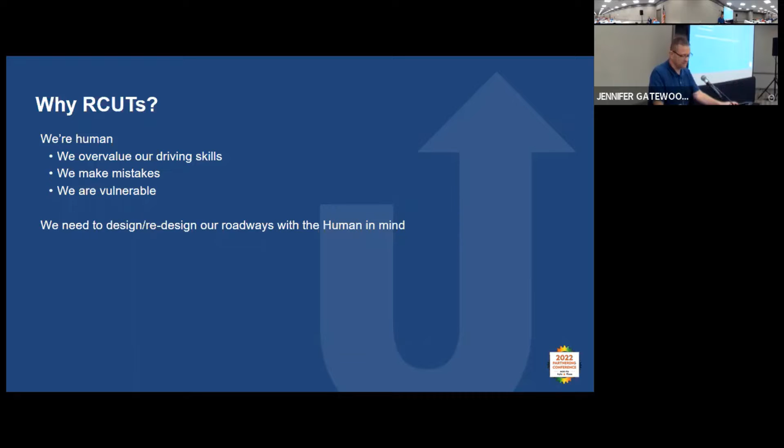So more specifically, how do RCUTs help? Well, the big thing I like to remind everybody is, even though it looks complicated, RCUTs are actually simpler to drive. There's actually a lot less workload for the driver. And that is because of the much lower number of conflict points.

So it helps address some of that vulnerability with the driver. But just in general, because of those fewer conflict points, there's just a lot less workload on the driver, and there's less things to keep your eye on when you're at an intersection. You're going to be more successful and less likely to make a mistake, which then leads to less crashes. So just having fewer crashes opens up the opportunity for fewer of those severe outcomes.

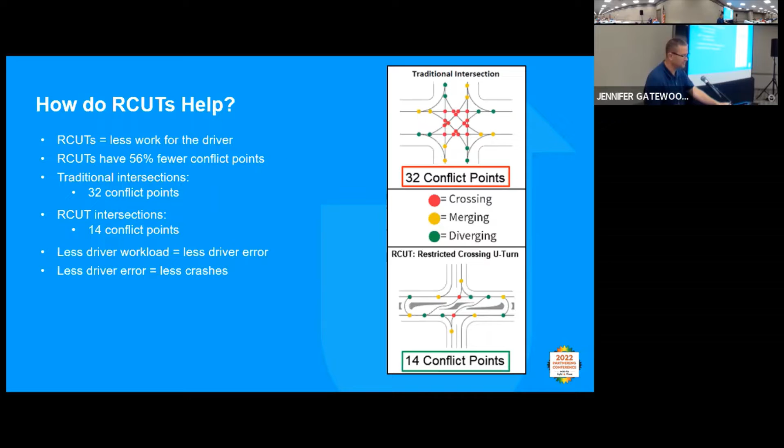So more specifically, what kind of benefits are we seeing? Well, they're pretty significant on the safety side, and there's some capacity benefits too. I'm a big proponent of safety, so let's talk about those benefits.

When we look at RCUTs on the national scene, we're seeing about a 30% reduction in all crashes, not just angle crashes, all across the board at the intersection. There's a lot of safety countermeasures where 20-30% is a pretty big deal.

But when we look at severe crashes nationally, we're seeing about a 70% reduction. There's a lot of variance across RCUTs nationally, so it's not like they're hitting these numbers precisely, but on average, 70%. That's enormous—there's a lot of safety countermeasures that would love to be above 50%, but few obtain that. RCUTs have been proven to really do a good job.

In Kentucky, we're seeing a little bit better than the national reductions, which we're really excited about. We've got 8 RCUTs in Kentucky on the ground with at least 2 years of after data or more. When we look at those, we're finding almost half of our total crashes have been reduced. The big plus is we're really close to 90%, 87% of our severe crashes—many with an injury or worse—have been reduced in our first 8 RCUTs. We anticipate seeing that trend continue.

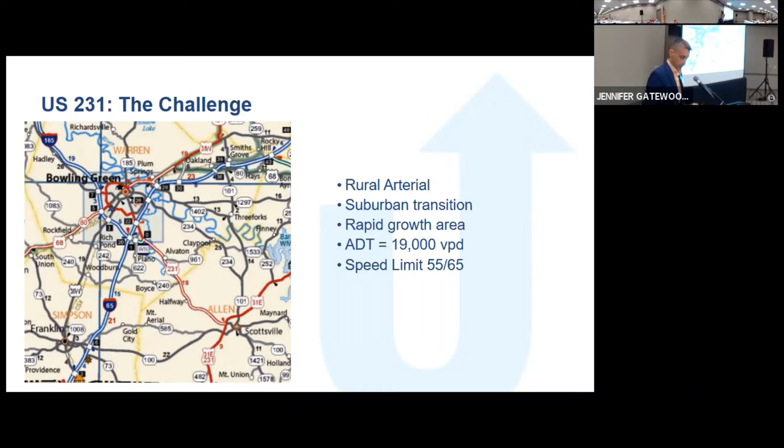Also worth noting is the speed limit—the posted speed limit changes within this project corridor. It's 65 miles per hour from about halfway through the project to Scottsville. I'll point out on the map, you'll hear us talk about the community of Alvaton, right here in the middle of the map. That's the south end of the project, highlighted here.

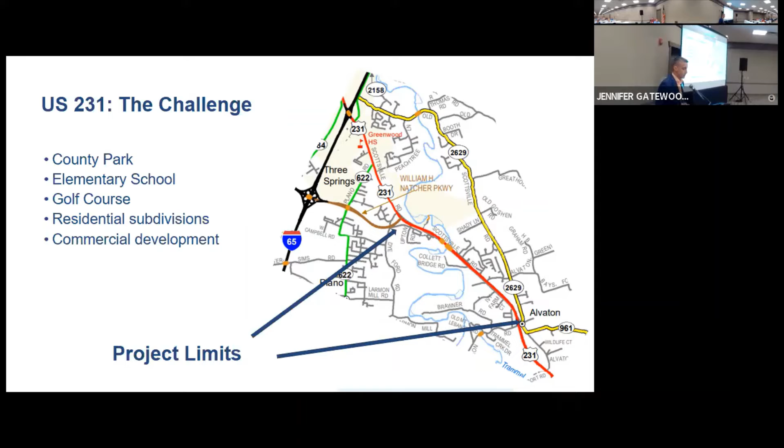As we zoom in on the next slide, just to get your bearings about the project location—the project has along it a county park which is very active, with a lot of special events; thousands of people come for softball games, cross-country meets, and other big events. There's an elementary school in Alvaton, which is at the south end of the project. The Natcher Parkway's southern terminus is the north end of the project. There's also an internationally acclaimed golf course along the project, residential subdivisions throughout, and some commercial development starting to happen along the corridor.

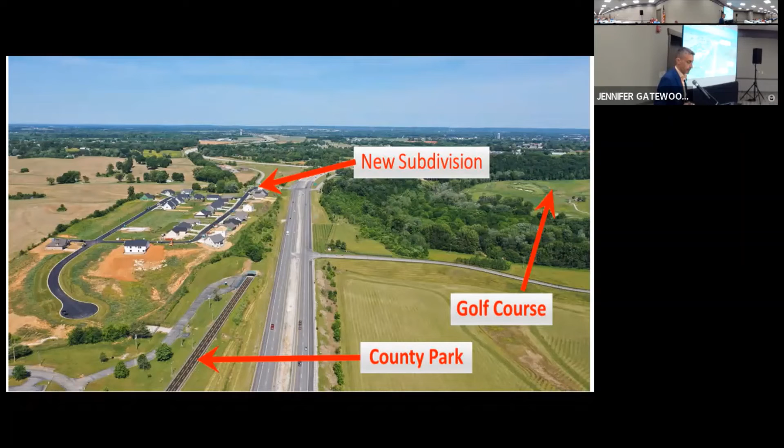These photos will show basically what I was explaining on the map. This drone photo is looking north toward Bowling Green. The Natcher Parkway intersection is the north end of the project. You can see new subdivisions, the golf course to the right, and the county park starting to emerge on the left.

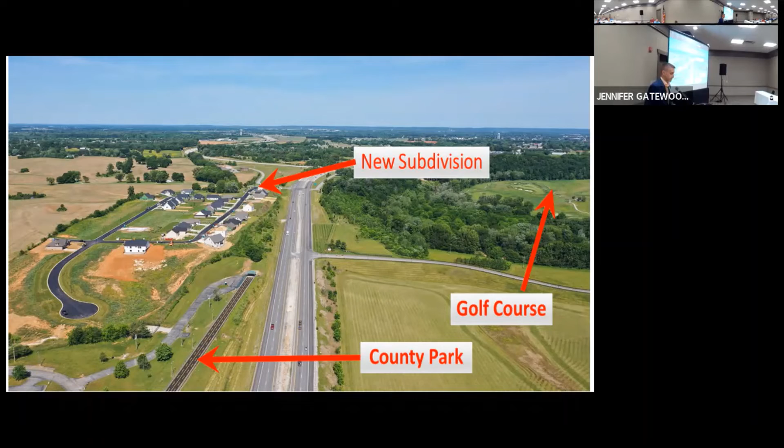I'm thankful to say that with the RCUT project, we were able to be proactive and get in there before signals became necessary. This intersection in Alvaton is at Mount Lebanon Church Road.

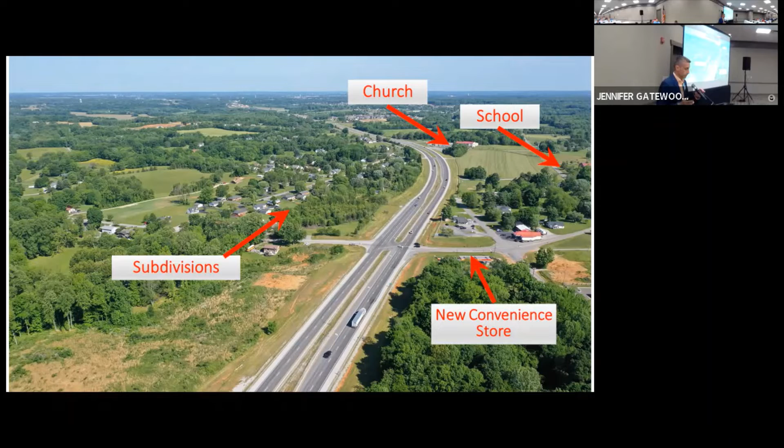This was the primary intersection that was of concern. When Mike Vaughn and his counterpart, Deanna Mills, came in early 2019 and said, Mike, I got a project I want you to look at, they were in Bowling Green for another project inspection. So we took a tour, got in the car, went about 15 minutes south, and I showed them this intersection because we had some crash experience.

I wanted to see if we could be eligible for some HSIP funding. And to my delight, as we drove through the corridor, we said, well, we should do all of these intersections. It's about 2 miles of these type of intersections, subdivisions, as I mentioned before. A lot of exposure to risk.

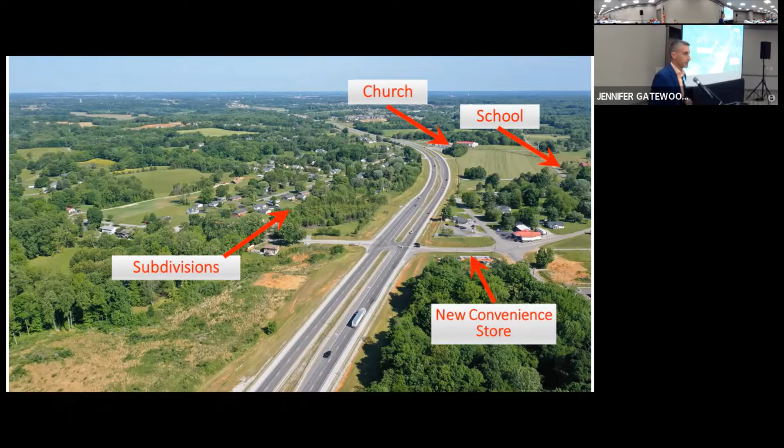So the way we went, April 2019, design funds were authorized, but the challenge had only just begun. Just a few months later, in July of 2019, there was a fatal crash at that intersection I was emphasizing on the previous slide. A slow-moving vehicle turned left into the side street, and then there was a crash that resulted in a fatality.

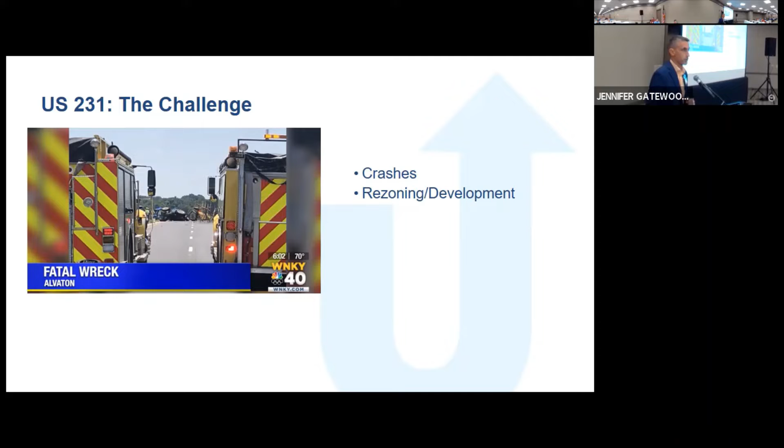So, of course, immediately the calls come, as they had been previously, about the need for traffic signals, along with the rezoning for development, month after month. I'm sure you see it in your community, the planning commission meetings, standing room only, folks coming, the NIMBY type folks coming to oppose anything new, subdivisions, apartments. But yet they continue to be approved and constructed.

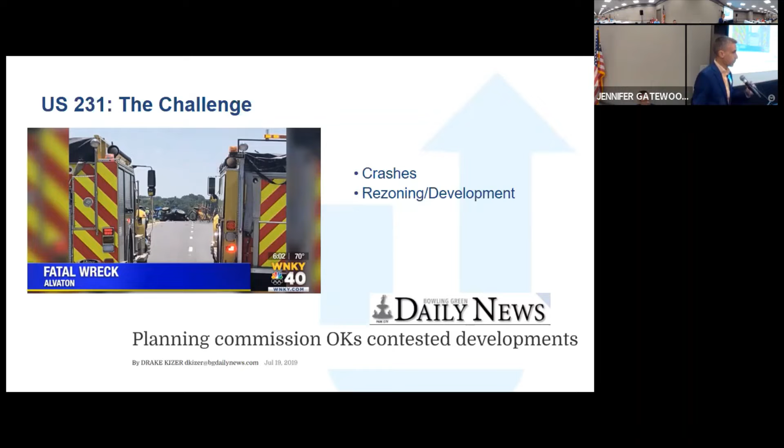So we needed to get this project on the ground as soon as possible. And fortunately, we had the design funds that summer, but we had to work with the public to address that we know and we're working on it, please be patient. Fortunately, we were in District 3, we were fortunate that we had a couple of these that were either under construction or in design.

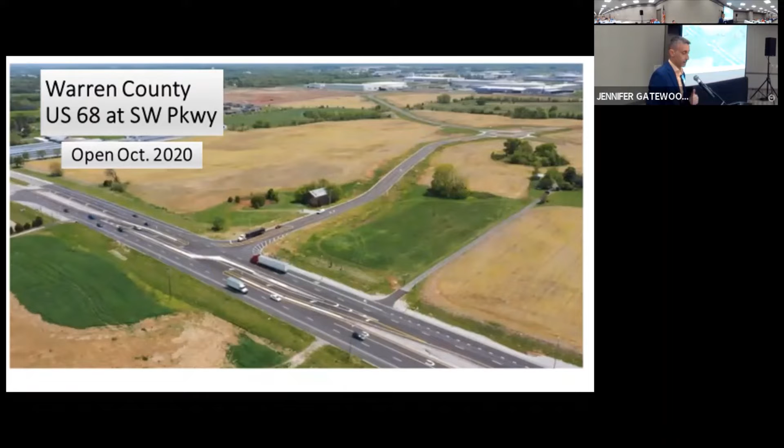So we were able to tell folks, hey, just go down the road. You'll see an RCUT. You'll see it in action. You don't have to try to describe it to you. You can drive one and see it in action.

But it still became the challenge. The challenge is, of course, engaging the user, and you can't do that with data alone. We've experienced that. I'm sure you've seen it at meetings where you try to portray something innovative like a roundabout, which we had experienced in Bowling Green a few years before, and everyone threw tomatoes at it until it opened, and then folks said, oh, this isn't so bad.

And that happened with the Logan County RCUT as well. Lots of concerns during construction. As soon as it opened, all the calls just went away, and people adapted. So we all had great hopes that would be the same way in Alvaton.

So there was no public forum, and this was by design. With safety projects, you don't really have time to have public meetings and asking people for input. And maybe that's a mistake. Maybe you would choose to do it differently. But we were concerned that if you give too much time, there's time for the opposition to do their part and stop the project. And we've seen this elsewhere in Kentucky where that has happened, specifically on an RCUT project.

But we did engage the key stakeholders. I told people I was like an encyclopedia salesman. So I got my exhibits and my maps, and I went to talk to the superintendent of county schools because of the elementary school - how is this going to affect school bus maneuvers? The judge executive in Warren County is the second longest serving judge in Kentucky, retiring this year after 29 years. So nothing happens in Warren County without his seal of approval for the most part. And then Jim Scott, who I told you we'd come back to, the golf course.

Be patient on one of these type of projects because there's going to be a lot of changes, and the project was constantly evolving as we were faced with those challenging growth issues. I grew up in District 3, just north of Bowling Green, went to Western Kentucky University in the 90s, and actually cut my teeth on this corridor, 231, as an EIT in the design section - and in metric, if you remember those days, built it in metric.

But you know how Bowling Green has changed over the years - as I visit the community now, I can't even find my way around. It's just amazing how much it's grown. So that's really part of the challenge here on this corridor, is that over time that 4-lane high-type facility just got really congested, and it's evolving so quickly.

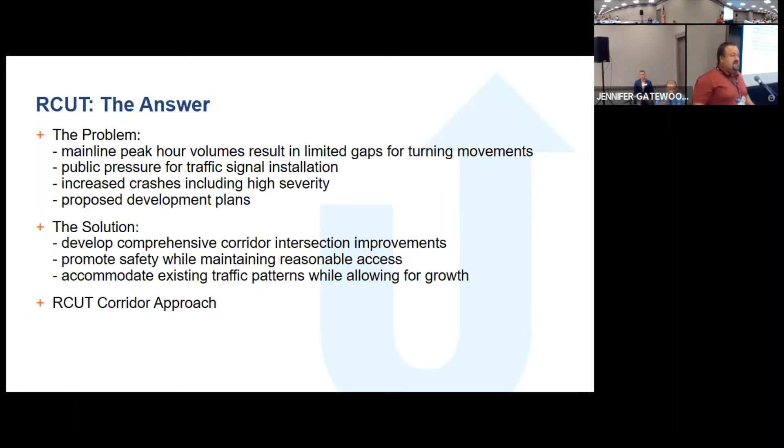The crash rates were rising, but the warrants for traffic signals were probably borderline, or probably not yet met. But a lot of the public pressure was there to install signals at that next level along the corridor. So having the leadership and the vision to create something different here - I think that's on the project.

So Joe did a great job of summing up the problem statement, and then the solution. We looked at a comprehensive approach to the corridor - we didn't want to just look at one intersection and isolate that and then put a signal somewhere else, put a signal down here. We really wanted to develop a solution that is corridor-wide, that's consistent, that raises the driver expectancy as they're traveling.

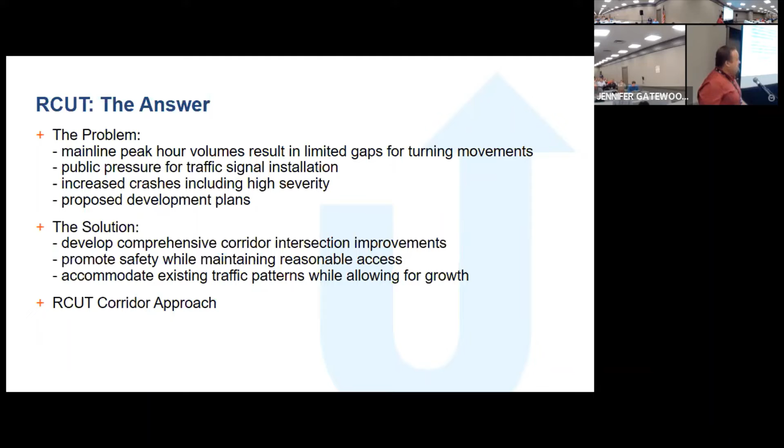So that's where RCUT came in. You'll see the phrase reasonable access, and I think Mike said it best earlier. If you look at RCUTs, it's really not changing access at all, but it certainly maintains reasonable access. On a facility like this, on Dixie Highway or any other 4-lane congested highway, there's no gaps at certain times. The peak hour volumes get to a point where there's no gaps, and without gaps to make left turns, you're going to make a right turn, turn around, and go the other way. We're just facilitating that in a less risky manner.

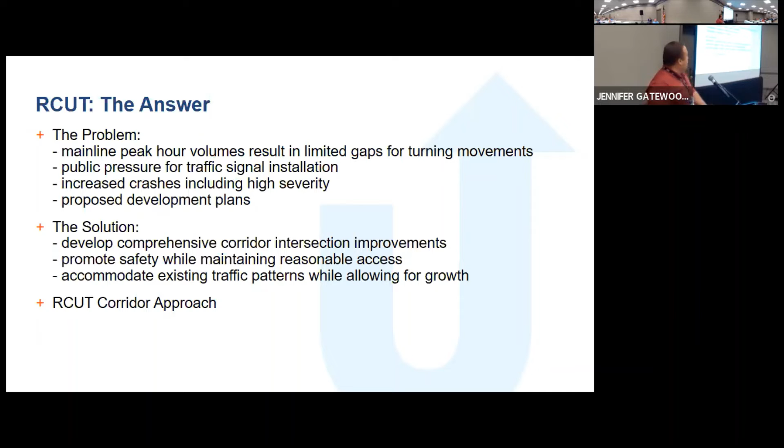With the design considerations, rapid growth, it was evolving constantly as we were putting the layouts together. I think we went through probably 10 or 12 iterations. We thought we landed on one, made some adjustments, then ran into utility issues and met the water district out there. They dug their facility up and said we can't get the material, and when we can, it's going to be expensive and we don't have time to relocate it. So we shifted things a little bit to avoid that situation.

Just the typical project development challenges you face on all your projects. But we really wanted to keep this moving. As Joe mentioned, we didn't want to lose steam on this project. So providing reasonable access includes the construction phase, and Justin's going to hit on that a little bit later—some of the challenges they faced in the field as this rolled out.

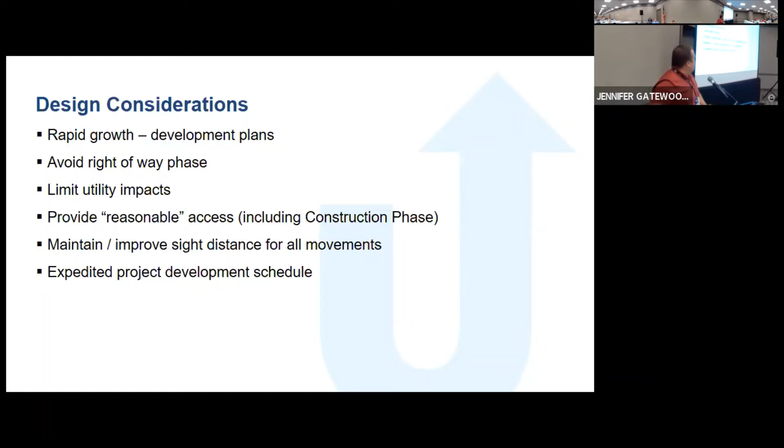And then again, I hit on the expedited project schedule. That leads us into the next part of the project, our proposal development. We decided early on, in order to keep this moving, limit right of way, limit utility impacts, and get this to construction as fast as possible. I think the project team would all agree now that we would do it differently, and we are doing it differently on other projects, but we did put this into a proposal type letting, and we probably pushed the limit on what you could do with proposal documents—putting plans with about 7 to 9 intersections into a proposal style procurement package. Justin's going to hit on that a little bit later too.

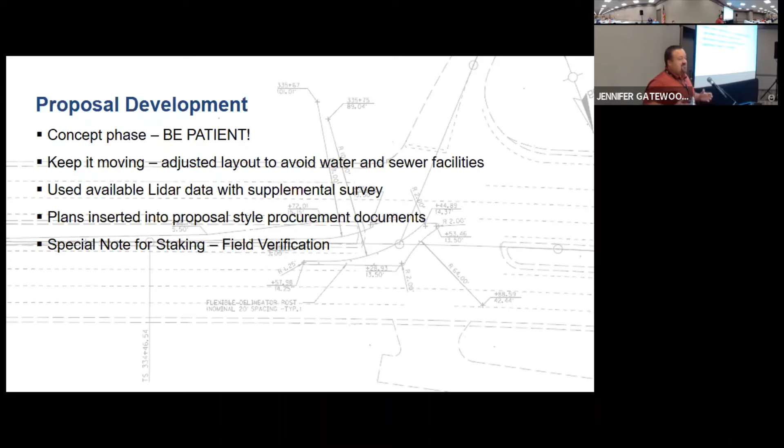But again, be patient as you're developing this type of project because things change all along the process. Don't be afraid to make tweaks and adjustments along the way, even if it's two weeks before it goes to letting—sometimes you just have to make the change. So keep it moving. We used available LiDAR data and supplemental survey, but we pushed the survey and that rolled into a special note for staking. You can see me after if you want to see what that looks like, but it was pretty long. The staking special note was pushed to the contractor, and Justin's going to hit on some of the challenges he faced in construction with that note.

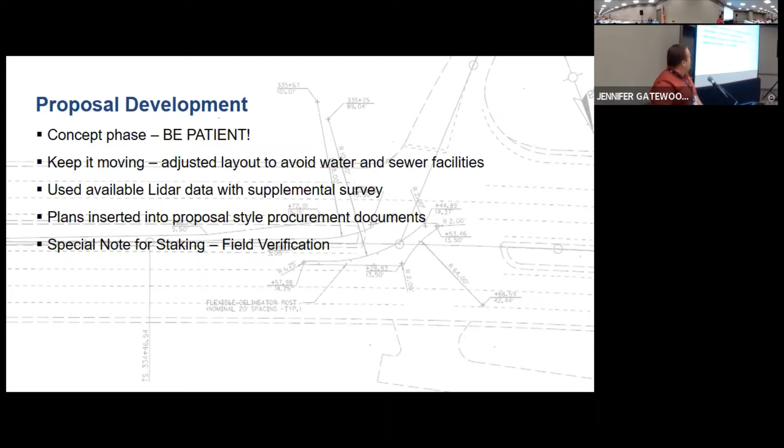So with that, Justin.

The letting date for this project was February 19th of '21, and the lowest bid was awarded to Charles Lewis Construction out of Franklin, Kentucky. The awarded cost was almost $3.5 million. The other competitor was Scotty's, which Joe had already mentioned—that subdivision is basically right in front of this corridor. They were still below Scotty's estimate, 14% below the engineer's estimate.

So we were a little surprised at that. That was our first red flag there, that we may have some challenges on this project. The completion date was November 15th, '21.

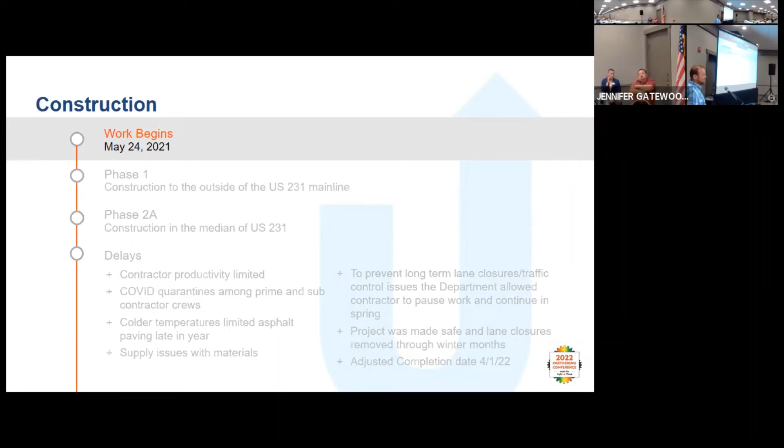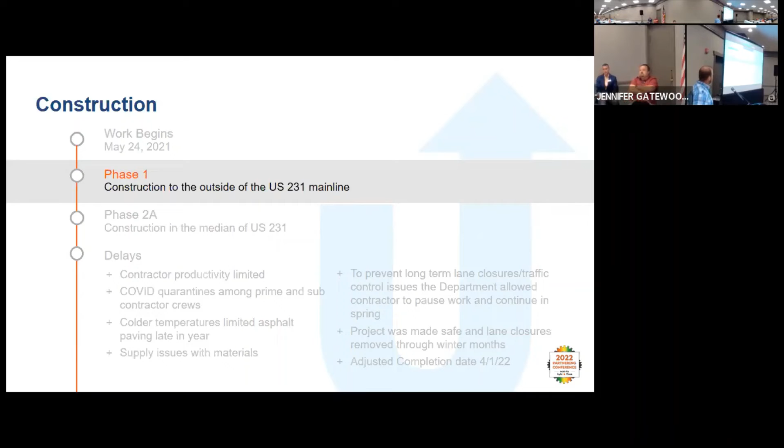Charles Louis began work on May 24th of 21, and this project was broken into 3 phases. Phase 1 was to close the outside lanes and construct everything on the outside of the roadway on both sides of the road. Then phase 2A was to switch traffic over to the outside, close the inside lanes, and construct the turn lanes and median crossovers.

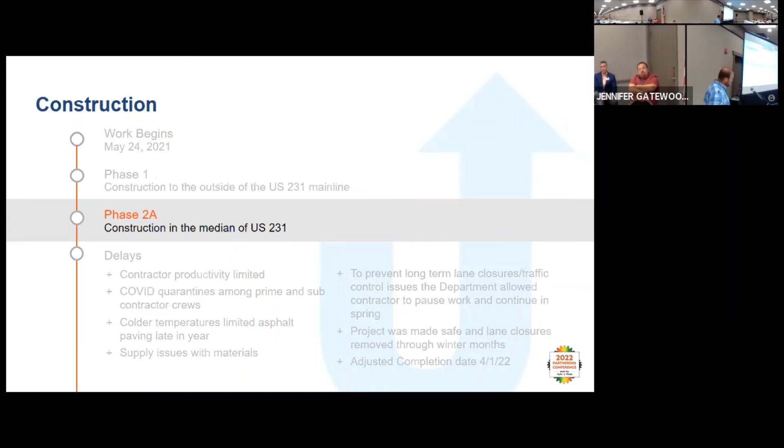Here's where we ran into some challenges. The first thing is the contractor was really limited on their productivity. They started out with one crew out there and had several mistakes. I know one instance, they milled up full depth shoulder that they weren't even supposed to work on, so they had to put that back full depth for several hundred feet. So they weren't that efficient.

We also ran into issues with COVID quarantines. This is the middle of the pandemic, and these quarantines were in the prime contractor and their subs, affecting their workers and the workload.

Going toward the end of the year when we got closer to the completion date, they were probably running about a month behind on their work, and the colder temperatures were limiting the time they had to put down the asphalt, which prevented them from getting the work done.

We also had, in conjunction with the COVID quarantine, supply issues of materials, especially pipe for the drainage work. As we were closing in on the completion date, we had several meetings with the contractor, and we realized they weren't going to get this project done before the weather was going to stop them from working anymore.

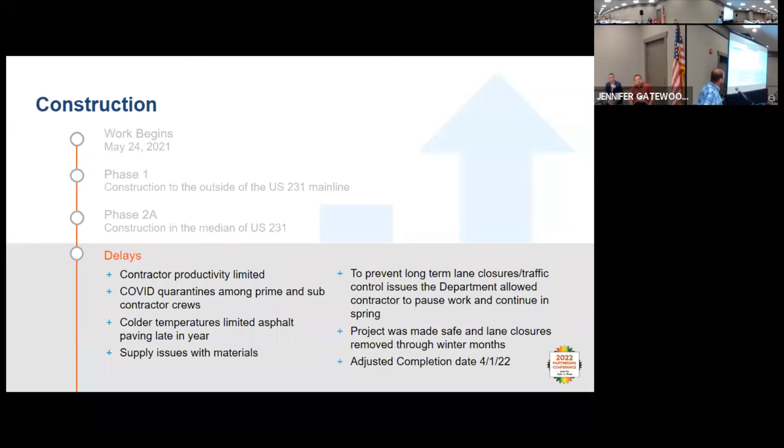They actually got back started in March, and finished it on April 1st. That last phase, 2B, was where they actually shut down the intersection and poured those concrete medians, which forced the traveling public to go right if they had to make a left turn.

So you can see some pictures here.

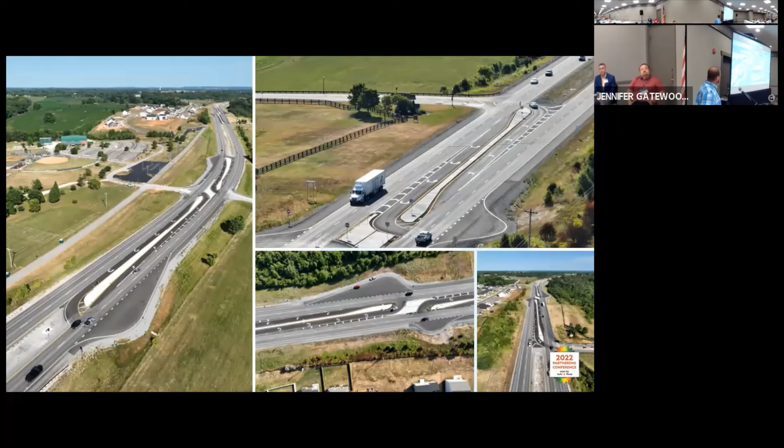Some of the challenges were, this was a proposal only project, like John had mentioned. The plans were inserted into the proposal, and so it was tough just printing out the proposal and getting the plan sheets to the right size so you could actually see what's going on.

We had some issues with the LiDAR information that they used. I'm sure it's decently accurate, but it's not near the scale that we really need, the accuracy that we needed out in the field to be able to check the survey.

The next thing is the special note for safety. It says, contrary to section 201, perform items 1 through 2, usually performed by the engineer. That is, the contractor is to provide the adequate control points, and they are to verify that the sections are to grade and alignment and adjust if necessary.

That proved difficult for this contractor to do. They didn't have a very strong surveying department, and so it made it tough on us as well to check what they were doing. Basically, they would model in their office, come out in the field, show us what they had, and we kind of had to say, yeah, that looks right to me. So that was the challenge there.

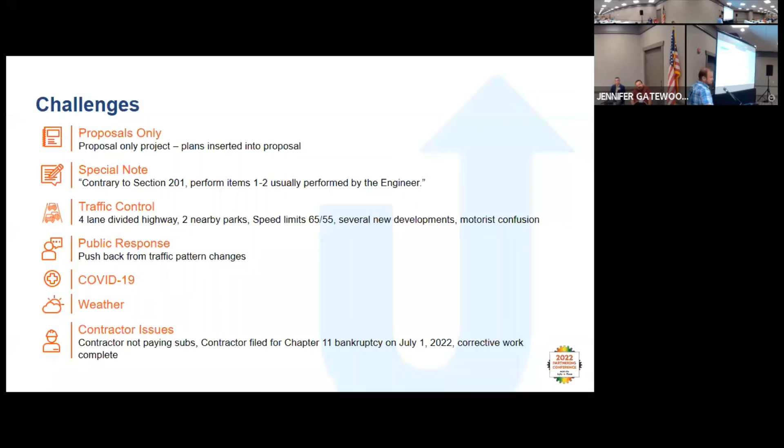Toward the end of the project, we actually had to start holding pay estimates because the contractor wasn't paying the subs. So we started suspecting that things were not good in the contractor's bank account. We learned this after the project was complete - we learned that they filed for Chapter 11 bankruptcy on July 1st. Luckily they're still around and they finished the corrective work last week. So that's good.

So, lessons learned: this type of project really needs to be fully designed with accurate survey control, like I mentioned. That way our staff can verify what we're actually building out in the field. And we need some kind of standard drawing on RCUTs and the signage that applies to that.

There was some confusion out in the field about the U-turn signs there. Whenever you have a turn lane that goes in the median, there's a no U-turn sign that goes there, but right after that, there's a U-turn. So it's confusing for the motorist - does this sign apply here or down there? That's the kind of confusion that we were looking at in the field.

The next thing is we really felt like we needed to provide a physical barrier on each median crossover or each median turn lane. I'll show you on the next slide.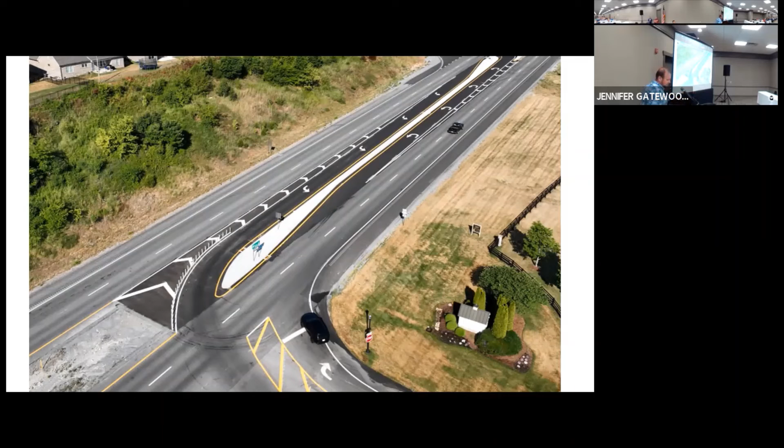Here we took out pavement, and here we took out pavement. But traffic could still, because there's no concrete barrier here or here, just dip across there if they wanted to - even though there's stripes indicating how you're supposed to use it, they still would just go across. So we added these quick curbs. They're pretty expensive, but we added them to help prevent the traffic from making a turn, forcing them to turn right.

The next thing is how to get the information out to the public. We worked with our PIO, West Swap, who did a good job conveying that information to the public. But only so many people actually see our press releases, only so many people watch the news. So there's a lot of people that just don't know what's going on.

So I feel like we need more message boards, especially when we close down the intersections and work on the turn lanes and everything median. We put up message boards - we actually took our department message boards out - and we would have a message that said make a U-turn at the next location down the road, something to that effect, to try to provide more guidance on what they're actually supposed to do.

And then just my idea for the last point there is this project might be good to use a consultant, or do a little bit more of a plan on the media and how to inform the public on how to navigate this kind of change, because it's a pretty big change.

People would ask me like, so if I want to go to Bowling Green, I have to take a right, and then take a left? I'm like, right. And they're like, that don't make sense.

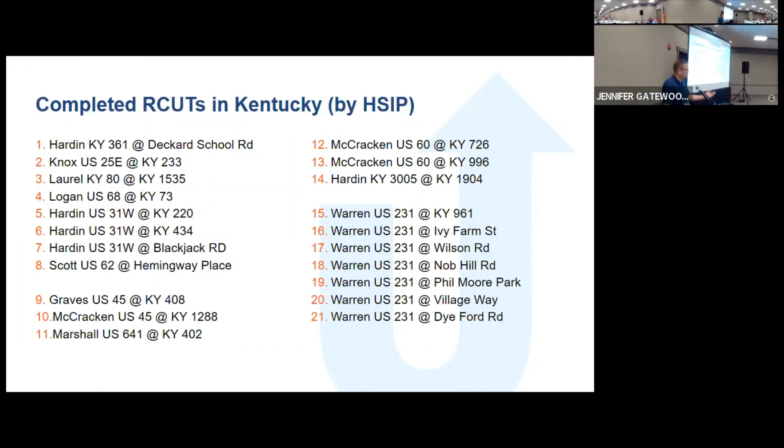So yeah, this was a very interesting project. I'll just finish up real quick with a little bit of a call to action for all of our project development partners here.

Here's a list of all the RCUTs that have been constructed—well, a few others have been implemented outside of HSIP funds, but all shown here are RCUTs implemented by the HSIP using HSIP funds. We've grouped them into blocks: the first 8 have been on the ground a while and we've done our before and after comparison mentioned earlier. The last block, 15 through 21, are the 7 locations this case study project implemented.

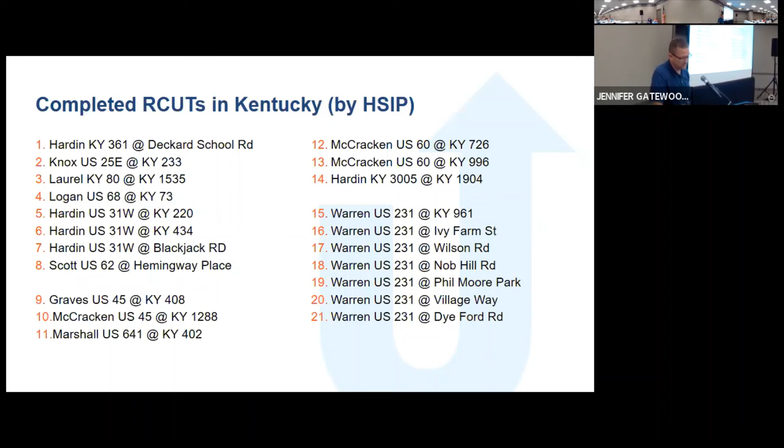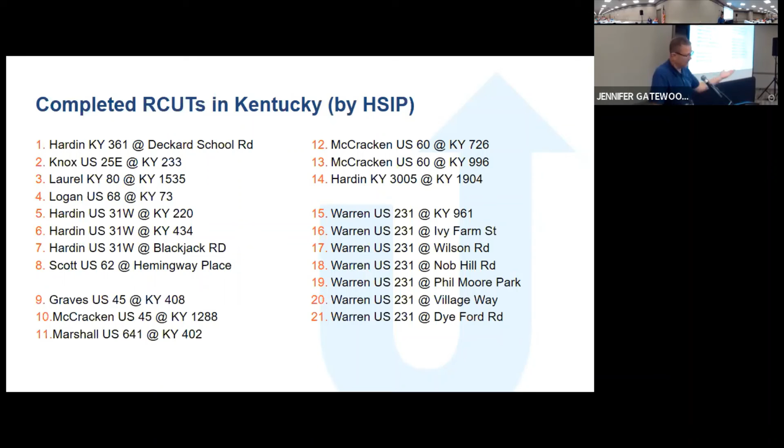Again, a call to action: as you're sitting in your project teams looking at challenges and solutions, are you ready to join the RCUT bandwagon?

Here's some of the folks who've been working with the HSIP to get those first 21 RCUTs on the ground and opened up. Hopefully soon everybody will be deploying this countermeasure, because it really is excellent—giving great safety benefits without the trade-off of congestion, slower speeds, or queuing. It's one of the few project types where you can say you're helping both capacity and safety. A lot of times those two things are at odds, and it's hard to find solutions that help both, but RCUTs accomplish that. So again, the call to action is that it's time for us to look for opportunities to implement RCUTs in any project where it makes sense to add that type of intersection control.

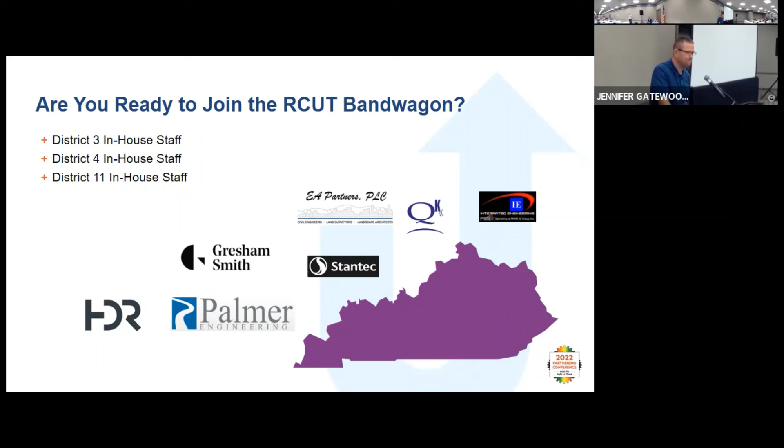We are at our deadline. Does anybody have any questions?